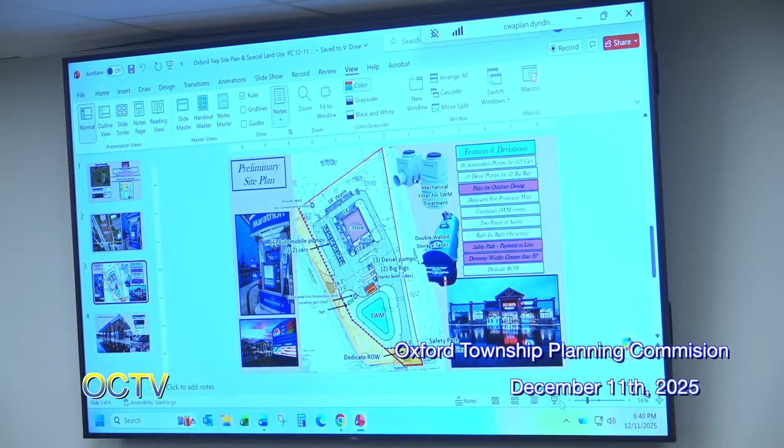Good evening, Mateo Pasalapua, Carlisle Warren Associates, the Township's Planning Consultants. As the chair indicated, tonight we have a preliminary site plan and special land use site plan in front of us to construct a gas station over 2 parcels located on the northeast corner of Oakwood Road and M24. Commonly known again as auto convenience mart, auto service station is the way the ordinance designates these uses, but it's essentially a gas station. Both parcels are vacant, zoned industrial light (I-1/light industrial), and will need to be combined prior to permits being issued for improvements. When the lots are combined, they'll equal 4.34 acres. Our review is conducted as if those lots had been combined.

The building is proposed to be 7,330 square feet, and the site proposes to offer 12 domestic gas pumps and 3 commercial diesel pumps. For zoning, the master plan future land use map designates the site as suburban commercial. The description for suburban commercial includes sites for existing or future commercial development compatible with the character of traditional shopping centers dedicated to multi-tenant retailers. To reduce the dominance of front yard parking, buildings should have a strong relationship with the sidewalk and road.

Parking should be evenly provided between front and side yards. Suburban commercial areas should primarily serve the day-to-day shopping and servicing of township residents, and such large format retailers, aka big box users, and regional shopping centers should be carefully regulated.

The site is surrounded by I-1, SF2, and R3 zones. Uses are light industrial and or vacant sites for the surrounding parcels. When looking at lot area, width, height, and setbacks for the building placement, we found no issue with setbacks or building heights.

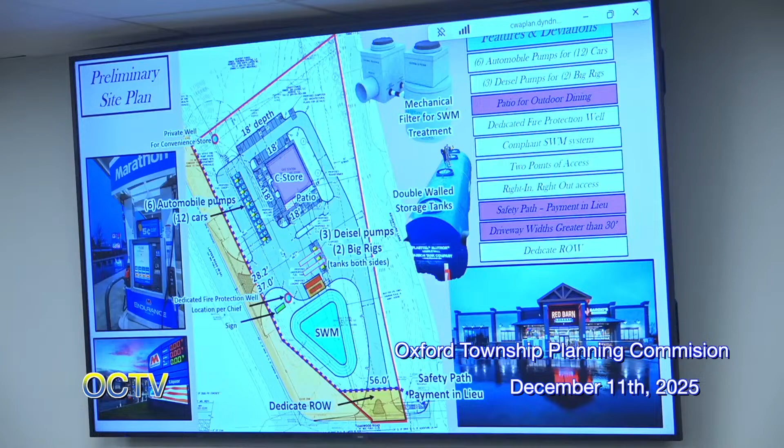So again, I'm sure when we go through the packet, you can see that they're looking to offer some commercial kitchen amenities on site for anybody utilizing the convenience market portion of it. You cannot operate a restaurant with outdoor seating as a principal use in your industrial districts. However, your industrial districts do allow for use as accessory to the principal use.

Seeing as how this has become a common occurrence in larger format convenience stores throughout the area, we just noted that as it's proposed, that commercial kitchen and outdoor patio area could function as an accessory function of the site, but it could not be increased in any way, shape, or form.

So they could not come back with indoor seating or want to make the outdoor patio bigger or want to expand the commercial kitchen or bring in another commercial kitchen. What they have here now, we're comfortable with finding as accessory. It just means you can't make it any more intense.

So that was part of the second. Again, I think overall, given the area, on the industrial businesses in that area, it probably will offer an amenity of lunchtime traffic and things of that nature. But again, it just can't become the dominant use of the site.

When we were looking at signage, signage is administratively approved by the township, but we did note a few items in the site plan as shown with unique variances as it relates to the monument sign height and the potential for building signage depending on how much and where. If that's the case, they'll go through township review and then end up in front of the ZBA if variances are needed.

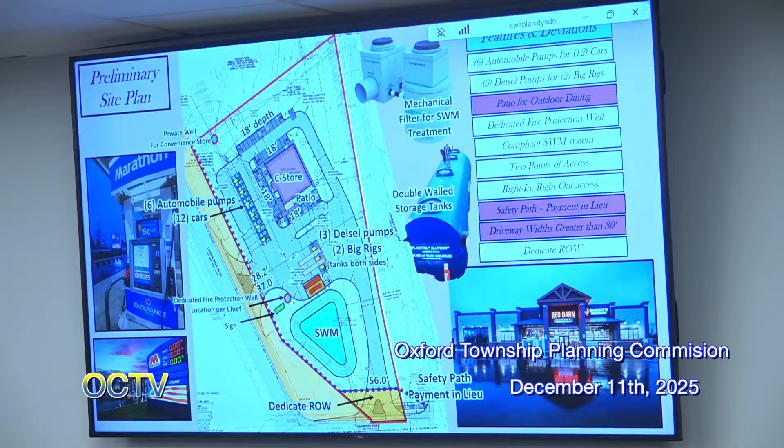With regards to the commercial kitchen piece of it, when you say it can't be expanded, how did you determine what was there is accessory? Is it based on square footage relative to the building, or is there something else? Yeah, square footage is kind of where you start. Looking at the floor plans, looking at the area that they had dedicated to the kitchen itself, looking at the area that they had for indoor seating - I don't believe there were spaces dedicated to indoor seating.

I can look up in a second. And then the outdoor patio, as designed, it was accessory. There's more square footage dedicated to the operations of the gas sales and convenience sales than there is in the kitchen and areas where people could potentially sit down and eat. Okay, so that was how it was sort of determined. Correct. Okay.

I'd like to ask some questions about the diesel truck area. You show two trucks here. What if there's two more that come in and want to fill up? Where do they go?

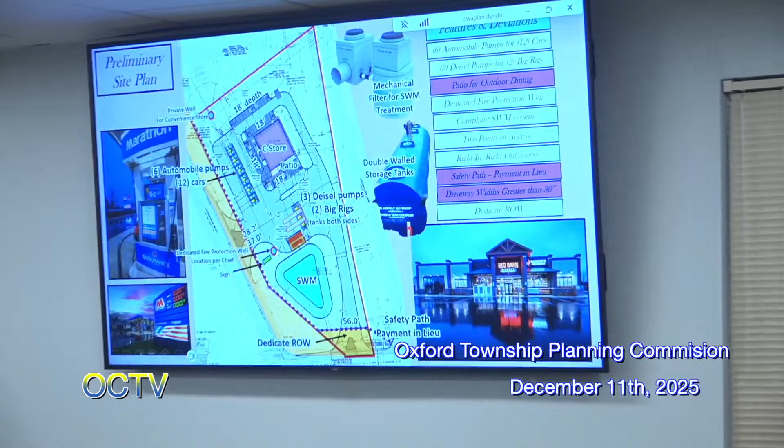So for the drive accesses, this drive coming in at the property line is 37 feet wide. The ordinance says it can be no wider than 30. No more than 30? Correct. And this one down here, once they dedicate right of way to Oakland County, their property line will be here, and at that point they're 56 feet wide. Again, the ordinance is 30.

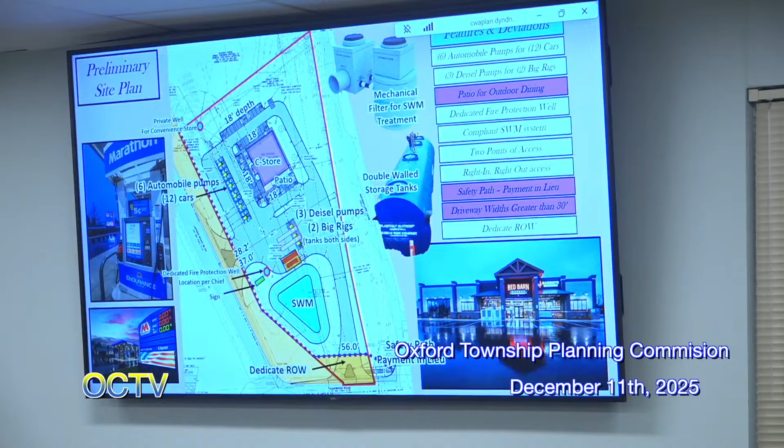In trying to assess that 30-foot standard, it's completely speculative on my part. I believe the intention of limiting how wide those drives can be relates to older truck stops off the freeway, where you turn off and there's a curb cut for 300 feet, as far as the eye can see because it runs the whole span of the property. Sometimes they put these restrictions in to make sure that doesn't happen, to ensure safe pedestrian access.

I will say 30 feet wide for a 53-footer to turn in clear without hitting the curb and tearing up the grass is tight. Yeah, it seems like in this proposed layout, it gives them more room to make a right turn to get to those pumps. Correct. So that's the dimensional variance we'll need there.

Building off the other commissioner's comments about Oakwood, coming off of Oakwood, is there an opportunity in that 30-foot dimension drive for a staging area? I don't know if that would help, giving them a spot to pull in and stage and wait. I thought I would just build off that a little bit so they could address it.

Thank you. A couple more things, Mr. Chair, if it's okay. The outside patio being asked about - the items in question I can't speak to. I don't believe we've been in receipt of an application for a liquor license for the site. I was just thinking that could be a concern potentially, people outside drinking. The applicant can speak to the intentions of the convenience store.

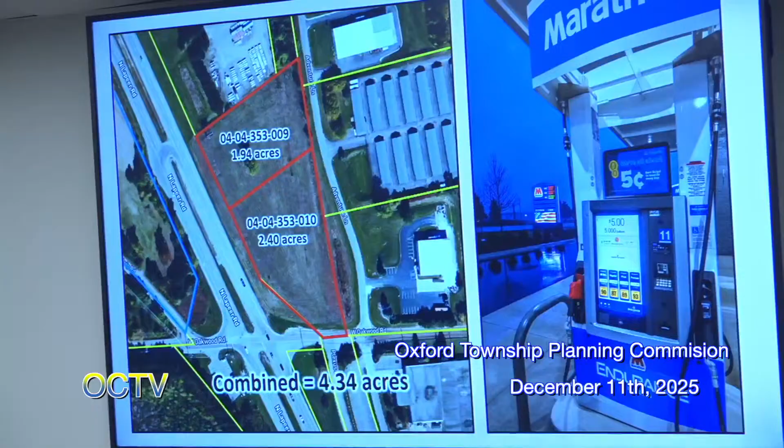I also wanted to show you a couple of the other slides. Not that there's any great information here that you haven't already heard, but you can see some of the photos. These are actual photos, not just stock photographs. These are photos that we designed, Vito built, Kevin designed the buildings, and you can see they're first class architecture, first class construction, first class maintenance.

Marathon has very strict requirements to be able to keep your branding. So they have secret shoppers come in and make sure everybody's wearing their uniforms, making sure the sites are clean. The utility oil company adheres to that strictly, or it would really put a cramp on their business, because they'd lose the branding, lose their ability to be a Marathon station.

Regarding alcohol, there's not any alcohol served on the premises. You can see in this photo there will be beer and liquor for sale, but not to be consumed on the premises. So you can't order a margarita and sit on the patio while you're charging your car. I just wanted to address those few questions that were out there, and again, we're available to answer any others you might have.

Okay. Thank you. I have no questions.

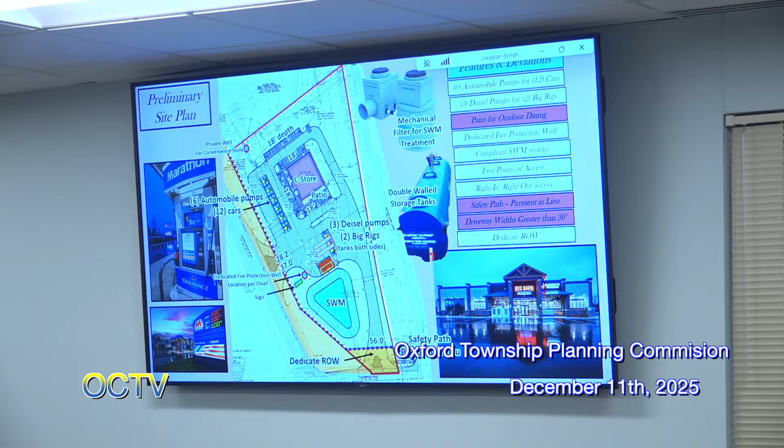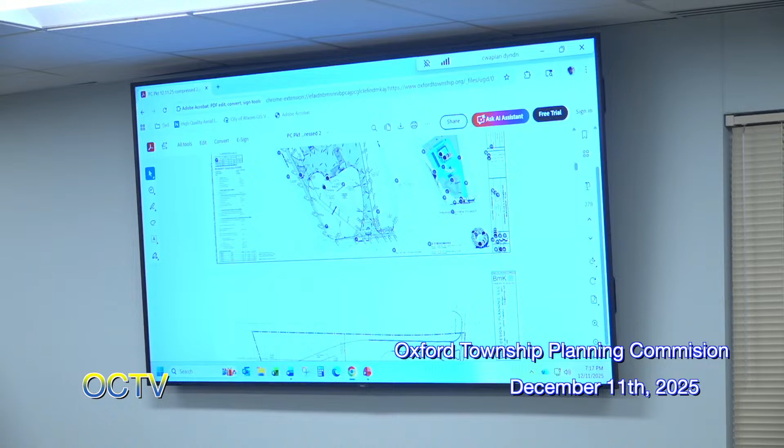Okay, so the drawing I'm looking at is page 70 in our packet. It has the pumps on the north side, and it looks like there are two entrances where trucks could come in, fill up, and then circle around behind the building. Let me get the circulation sheet up. Page 70 of 278. That one.

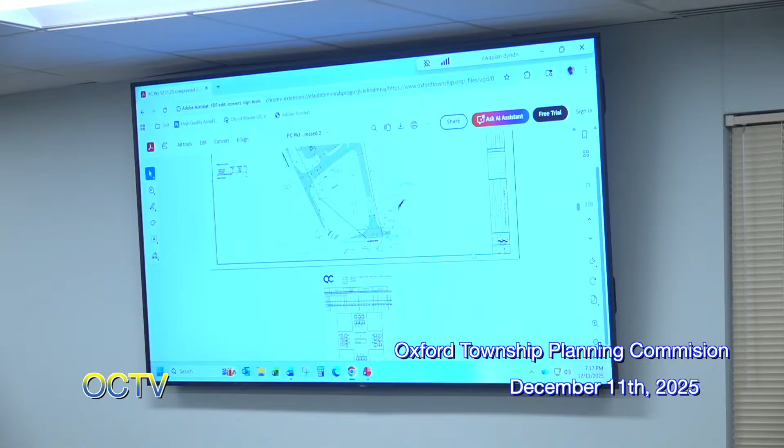See, it's showing the pumps on the north side where the trucks are pulling off 24, able to fill in and circle around behind.

Yeah, so that one's been... so the traffic study that's incorporated is utilizing this site. Okay, so this is not the segment that they're proposing. This is associated with the traffic study from August. Once the traffic study was done, we went back and changed the entire site plan to be in compliance with the actual traffic study.

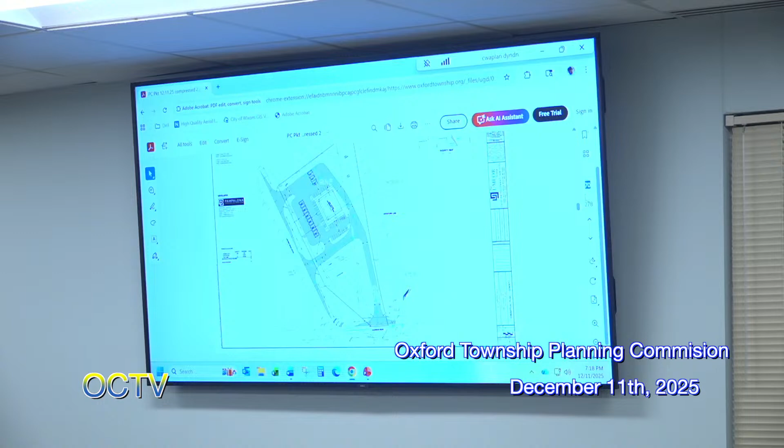So you'll notice, if you see the second entrance up by where the diesel is, we eliminated that because we didn't want people jumping across the highway to get into that left turn lane there, on that road. So that was one of the reasons.

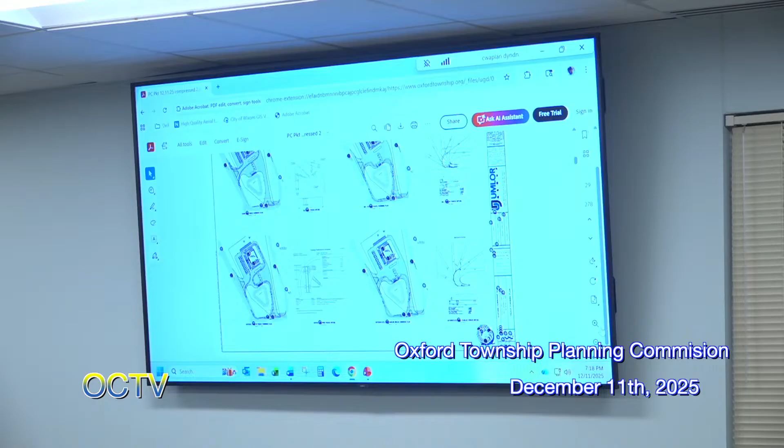So that was the traffic study. MDOT looked at it, made recommendations, and we made changes as a result, and that's what's in front of you tonight. Okay, so this is the circulation — let me find my way around this circulation.

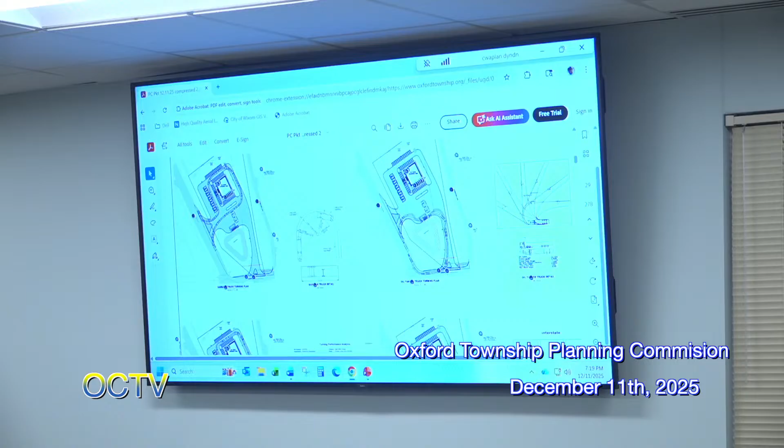Yeah, so you can see here, this would be the truck template, and you can see a truck turning in here. Can you make all of these turns? These truck templates show the truck specified next to the turn template about the routes they can take, and you can see several different trucks with several different routes.

Here's like a dump truck, and it can come in here, come all the way around and make all of these turns. It can actually turn right there and do a 180 in that turning area. So for the truck turning circulation, we have to specify what the truck is, what the turning radius is, and then show the paths it can take.

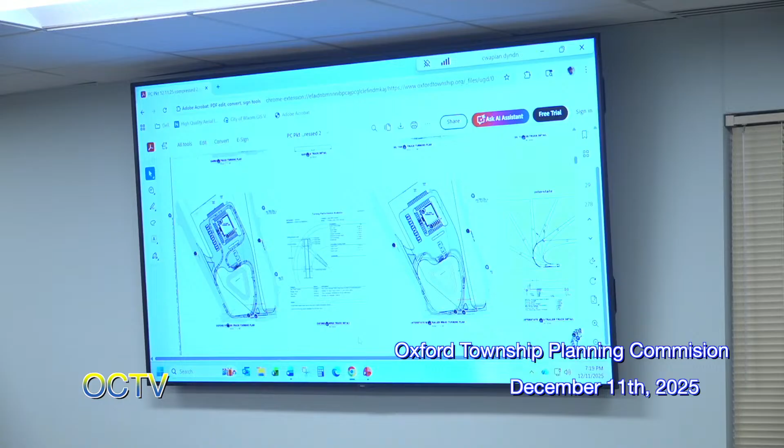And so we've got 4 or 5 of those on this sheet. Here's a big rig coming in — it can get over to the side. This is where the tanks are. It can go over to the side and make this turn.

So we don't have to guess about whether or not a big rig can come into that far pump and still make the right turn to get out of it. These truck turning templates allow us to assess the accessibility of each one of those different vehicles.

Okay, and is there no overhang or canopy or anything that would prohibit a ladder truck for the fire department from completely circling that building? No, so the canopies — if I go back to the PowerPoint...

So the engineer that designed this site works out of our shop — we have 65 employees, about 40 engineers. The gentleman, Chad, who designed this one has been in contact with the fire chief. We had originally proposed one well with a booster and a fire department connection over on the corner over here, and the chief said no, that's not what I want — I want a separate dedicated well. So we've agreed to put a fire protection well here.